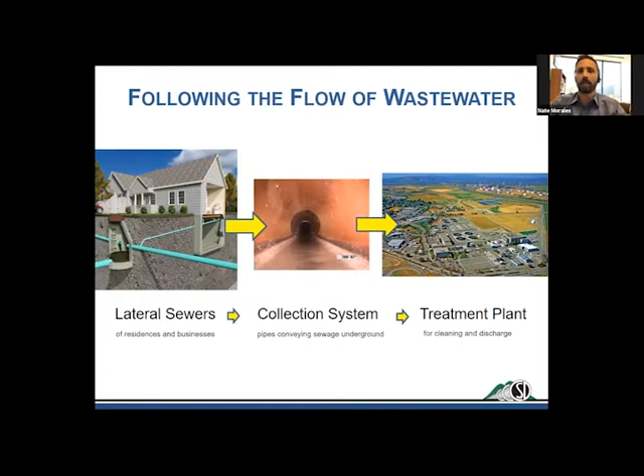Most agencies, though, find themselves with some customers that are in low-lying areas that require some pumping. And so at Central San, we have about 17 or so pump stations that pump out of areas like Orinda and Moraga up over the hill so that they can flow by gravity to our treatment plant.

So we've got two things to talk about here. One is our collection system, which is the network of pipes that are buried in the streets, and then also the treatment plant. So first, let's talk about the collection system. As I mentioned, there's about 1,500 miles of pipe, and in order to maintain and operate all that pipe takes a lot of work. We've got crews that every day go out and clean these pipes. Some guys run trucks that TV the pipes.

We have cameras that are mounted to tracks, and they drive up these pipelines and inspect them for cleanliness or damage. We also have crews that do other things like locate underground sewer lines if another company is going to come dig up a street, to ensure that they don't get damaged. And then finally, we also have crews who are responsible for going out and digging up pipes that maybe have broken or have a major clog or something that can't be retrieved otherwise.

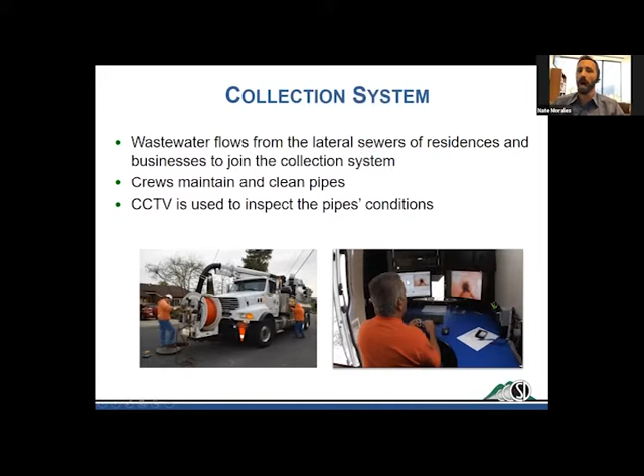So this photo here shows one of our large water flushing trucks. I'll talk more about that in a second. And here's one of our guys running the TV truck. So you can see he's got the TV footage here in these screens, and he's sitting in the back of a box van out in the middle of a street somewhere in our service area.

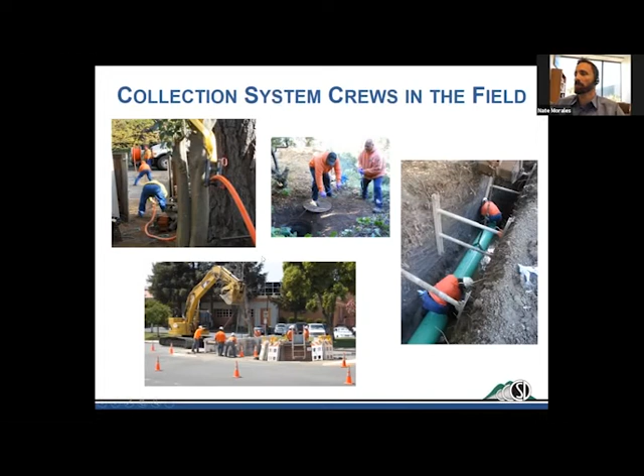There's two main types of sewer blockages that we experience in Central Contra Costa Sanitary District, and this is pretty universal among all wastewater treatment plants. The first of which is a root intrusion. Now, I think Emiliano, you asked about the history of pipes, and we're lucky enough at Central San not to have wood pipes, but we do have 100-year-old pipes in areas like Martinez and some of the older neighborhoods that are made of clay. And in fact, clay pipes were installed for, I don't know, 50 or 60 years beyond that, into the middle of the century.

So the good thing about clay is that it does not corrode. Clay pipe will last hundreds, probably thousands of years without breaking down. But the downside with clay is that it's brittle. And also when they originally installed these things, they come in very short segments. And so it's brittle and you have many, many joints. And so over time, we've found that the clay pipe is typically the first to crack, fracture, collapse.

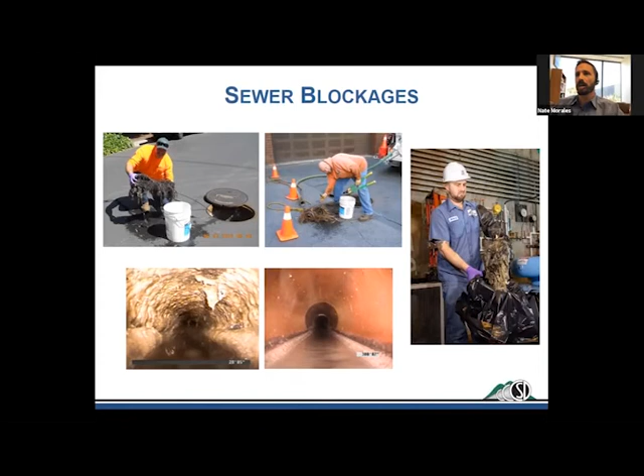Going to move on to the treatment plant. So as you might guess, our customers flush their toilets and run their sinks 24 hours a day. And so our facility also runs 24 hours a day, 7 days a week. On average, we receive about 40 million gallons of wastewater per day. And almost all of that water gets cleaned and then discharged to Suisun Bay, which is an offshoot of San Francisco Bay.

A smaller portion of that water gets cleaned to a further degree and then redistributed under water reuse. Matt alluded to that in his presentation. Basically, our reuse customers, our recycled water customers, use this water for irrigation or industrial uses. For example, a lot of golf courses will use the recycled water to water their facilities.

Matt also mentioned in his presentation that due to aging infrastructure of our collection system, the integrity of our pipes, and especially the clay pipes I was talking about, is not sound. These pipes are not necessarily watertight. So when it rains, the ground becomes saturated, and then that groundwater seeps into our pipes and increases the volume that we get at our treatment plant substantially.

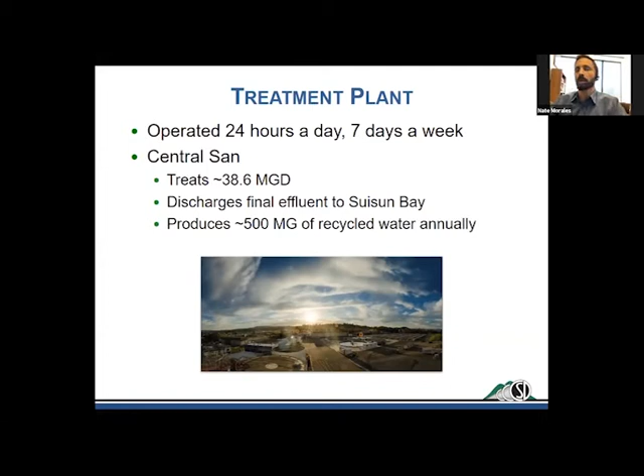All right, so here we go. We're getting into the nitty gritty now, and you should see some trends between the types of processes I'm going to describe and the regulations that implemented these processes that Matt talked about. So we're going to talk about primary treatment, secondary treatment, tertiary treatment, which is basically that extra step we take to make recycled water that can be used on those golf courses, and then, of course, solids treatment.

So let me take a moment here and just say that our goal at the wastewater treatment plant is basically to remove all the solids that have been introduced into the water, take those solids out, and send the clean water on its way to the bay. Those solids, as you can guess, are everything that we wash off of our bodies and dishes and everything else in our households, right? So when we take a shower, we introduce a little bit of dirt in the drain.

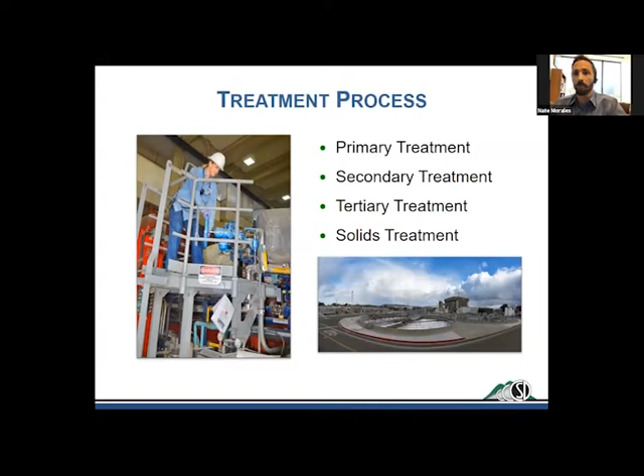When we do our dishes or run our garbage disposal, I think I saw a question on garbage disposals. When you run your garbage disposal, you grind up that celery, it goes down the drain and off to the treatment plant. And then, of course, everything that we flush down the toilet, right? It's our goal to remove all those solids, separate those solids from the water. And solids treatment is the process we use to dispose of those solids.

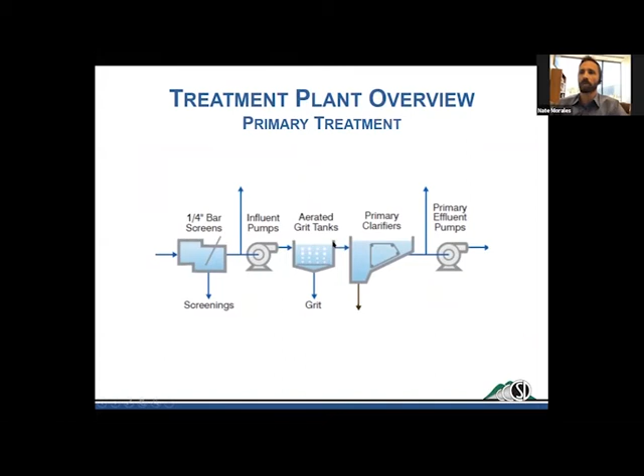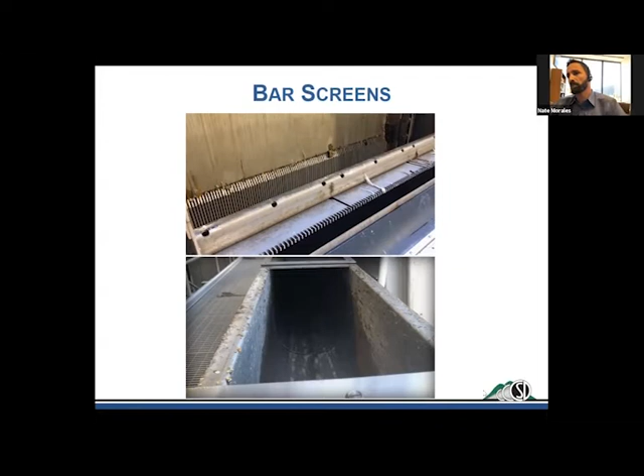And then the rake brings those caught solids up and drops them into this sluice right here. This is, you'll see in a moment, a slop of stuff that got caught on the bars, and it goes down this sluice to be compacted.

Now, I don't know if you guys caught it, but I want to again point out that most of what was getting caught on this bar screen was flushable wipes. They're back to haunt us. Here they are. They're getting caught, and we're trying to remove them.

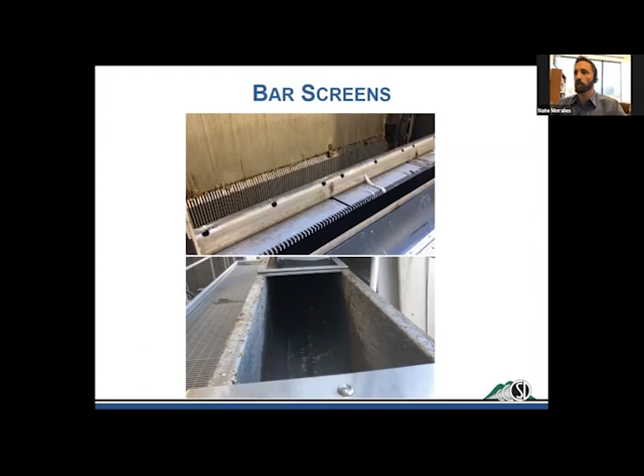So everything gets caught, goes down this sluice way, and then into a big compactor where we squeeze all the water out of it that we can and shove it through this pipe and basically make these huge sausages of whatever we caught. And here is a photo of our big old screenings sausages. These are about 18 inches in diameter.

And again, if you look at that consistency, this is mostly flushable wipes. And of course, there's a bunch of other stuff, but a large part, it's flushable wipes. So this then gets hauled off to a landfill.

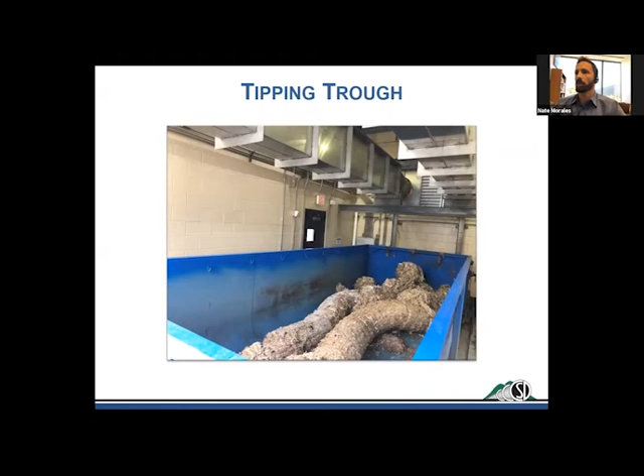All right, so from there, we take the water that passes through the bar screen and pump it up to the primary tanks. These are the pumps that we use to pump the water up to ground level of those primary tanks. You have to think about it. This water has just flowed miles and miles and miles.

In order for the gravity system to work, we have to bury our influent structures 20 or 30 feet deep in the ground. Well, it's so deep that you can't really work with it. So this first step here is to pump the water up to ground level.

And these pumps are huge. I think the ones in the foreground are 700 horsepower, and that's a typical size for some of our larger pumps at the plant. They run 24 hours a day, and they move water really well, as you'd guess. They fill an average backyard swimming pool in a couple seconds.

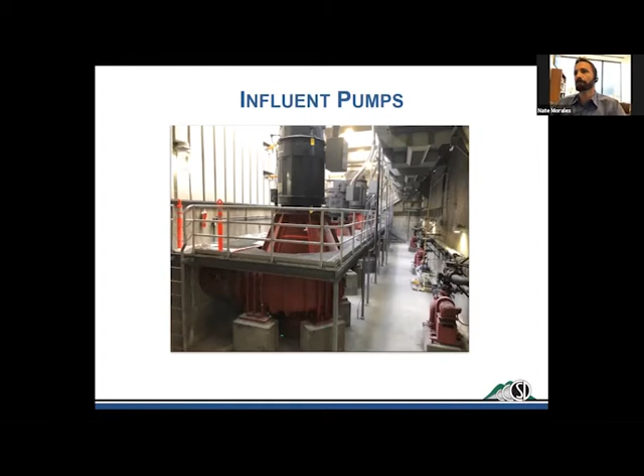So from these pumps, we flow into the primary tanks, and this is what Matt was talking about. This is what the regulators imposed in the 1950s, the implementation of primary sedimentation. This is a long tank, and the objective here is to introduce the water into the front and move it as slowly as possible across the tank to allow anything that's denser than water to slowly settle to the bottom. All the big chunks, right, as Matt said.

So the big chunks settle to the bottom, and then we have a scraper that runs along the bottom and collects those solids and pumps them over to our solids handling process. So this is the workhorse of the primary treatment process.

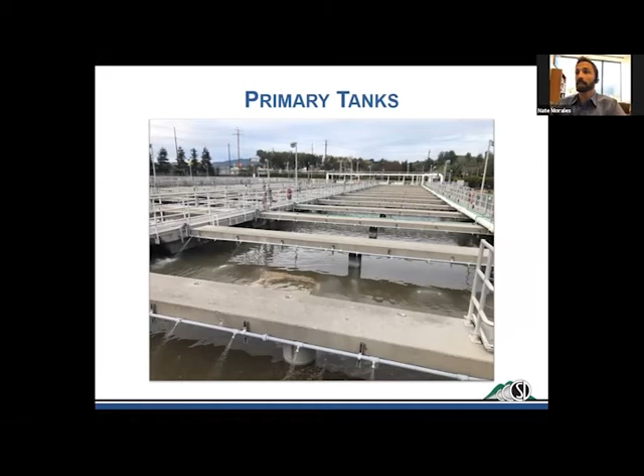From here, we move on to the secondary process. And as we just learned, in the mid-1970s, the secondary process was mandated. And again, here is a little schematic of our secondary process. Today, we're going to talk about these three components: the aeration tanks, secondary clarifiers, and UV. So from the primary tanks, water flows to our aeration tanks. I'm going to move to this next slide so you can see a photo of an aeration tank.

So think about it now. Our objective is to remove all of the solids from the water. We've just removed everything that's heavier than water that's settled down in the primary tank. And so what's left is all of this super fine particulate and anything that has dissolved in the water. So in this stage of the process, we're going to do our best to remove all of these ultrafine and dissolved solids that are left in the water.

The way we do that is by employing billions, probably trillions of little tiny microorganisms that want nothing more than to consume these little bits of organics. To them, this is food, right? And so I'm going to push play on this video. This is what the water looks like as it's flowing into the beginning of our aeration tank. You can maybe pick up the fact that it's sort of bubbling out here.

That's because at the bottom of this tank, there are diffusers that are releasing ultrafine air bubbles in order to increase the dissolved oxygen here. Because the little tiny microorganisms, the bugs as we call them, they're living in this water. They need air to respirate and to do their job.

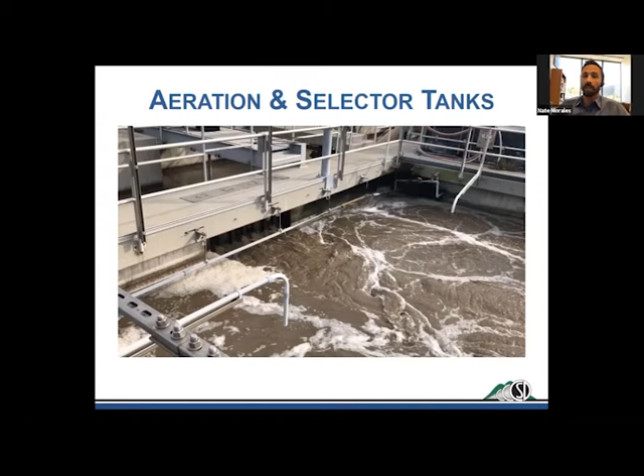And if we've done our job right, then at the end of this tank, we've got clumps of these little guys, all fat and happy, hanging out together, which sets us up perfectly for the next phase of the process, the clarifier. So here is a traditional secondary clarifier. It works very similarly to our primary tank.

Basically, the water that just came from the aeration tank is discharged in this center well, and the water then moves very, very slowly outward towards the edge of the tank. And because there's no turbulence, all those microorganisms that are hanging out together, they're denser than water, and they very slowly settle to the bottom of the tank, and the clean water then reaches the edge and spills out over the top.

So the clean water goes on to the next step of the process, and the bugs that are at the bottom, we suck them up with a little water vacuum, and we send them over to the solids building for processing, and we'll talk about that in a minute. So from here, the water is quite clean. This is the tank where we'll most commonly see ducks and seagulls. They love hanging out here.

There's just one final step that needs to take place before we can discharge this water to the bay, and that is disinfection. And so there's a couple common ways that wastewater treatment plants disinfect their wastewater. Many agencies will use chlorine, which is effectively bleach, to kill anything that's left, any bacteria, virus, or any of these microorganisms that slip past our system.

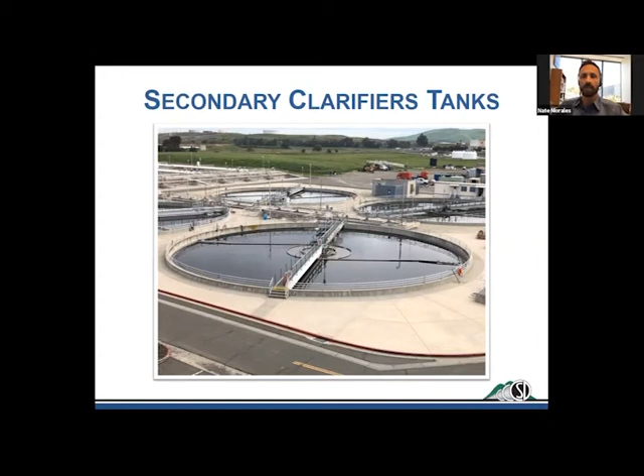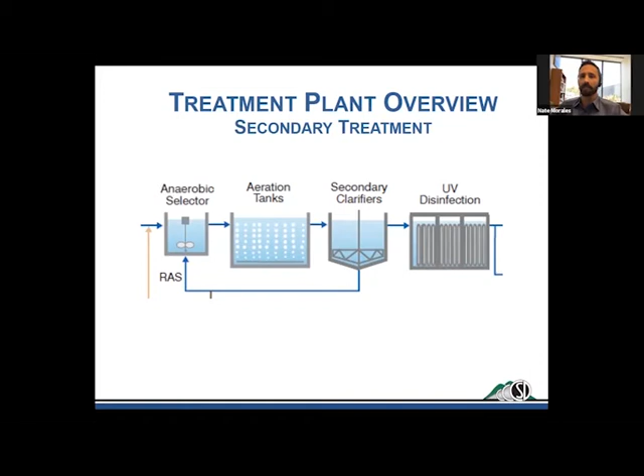But we at the district, we use UV disinfection. I don't have a great photo for you, but basically we run the water through these channels that have thousands and thousands of UV emitting light bulbs that kill any of the bacteria or bugs that are left. We basically sunburn them to death. So that is the end of the secondary process.

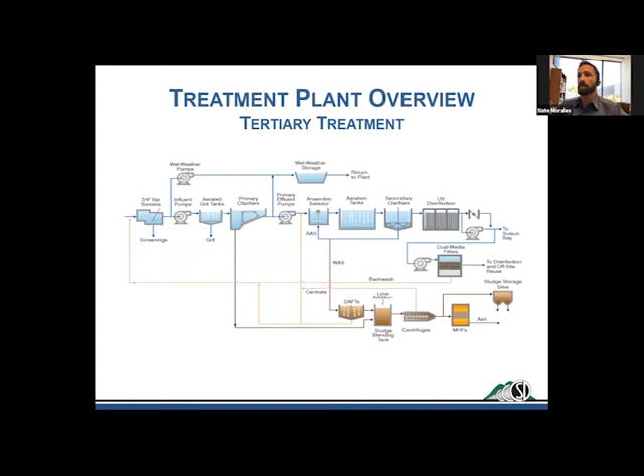From here, let's talk about the solids process a bit. Oh, actually, no, I forgot one point. I've got one slide here. Again, no great photos, but a little snippet from the schematic. Recall that we take a portion of the water that we send to the bay and clean it to a further degree. So we do that at this facility we call the filter plant, and it's essentially a form of tertiary treatment.

At our filter plant, we have a layer of basically crushed coal, we call it anthracite, over a bed of sand, which is over a bed of gravel, and the water is poured on top of this media. And as the water trickles down through the sand and through the crushed products, it gets cleaner and cleaner and cleaner, and all the remaining particulate gets caught up.

This works a lot like groundwater infiltration out on the earth. Just as rain percolates through a soil and gets cleaner and cleaner as it goes, this is water percolating through this sand media. And so then from there it goes off to reuse to our golf courses and to our industrial users like we talked about.

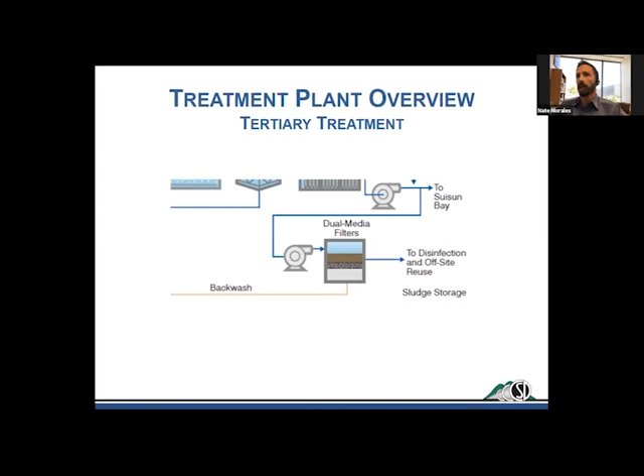Okay, now I think we're ready for the solids process. So there's a few different components of our solids process. Our solids process is a little bit unique. And I will talk about how we deal with our solids, and I'll mention briefly how most agencies manage their solids as well. So now we've got solids that have settled to the bottom of the tank in our primary tanks, right? All the big stuff.

We've got all these fat and happy bugs that have settled to the bottom of the clarifiers, and we pump all that material over to a blending tank. We blend it all together, and at this point, it's right around 97%, maybe 96% water. It's mostly water with a little bit of other stuff in it.

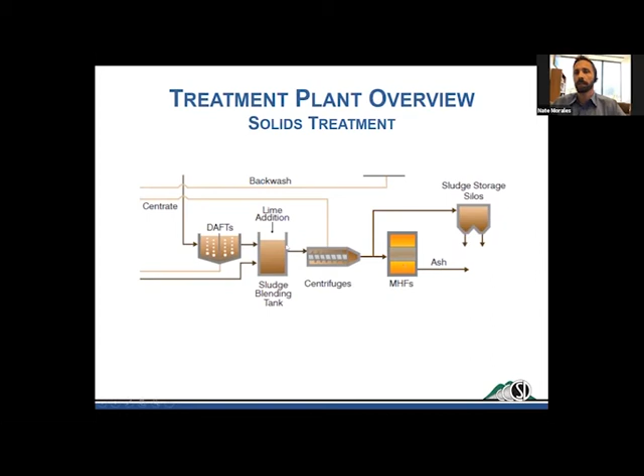It's not too glamorous on the surface, but basically inside of here is a cylinder, and it spins very, very fast and creates centrifugal acceleration. And just like the spin cycle on our washing machines, the water is separated from the solids. And so the water goes back to drain, and the solids, now that they've been thickened up, are ready to go to our furnace. At this point, we've removed a fair amount of the water, but not all the water. The product is right around 70% water and 30% solid.

So from there, we pump this solid. It's the consistency of toothpaste. It's thick, it's dark brown. It's probably the most foul substance we have at our facility. We affectionately call it cake because of the color, but trust me, you want to get nowhere near it. So this cake gets pumped to our furnace.

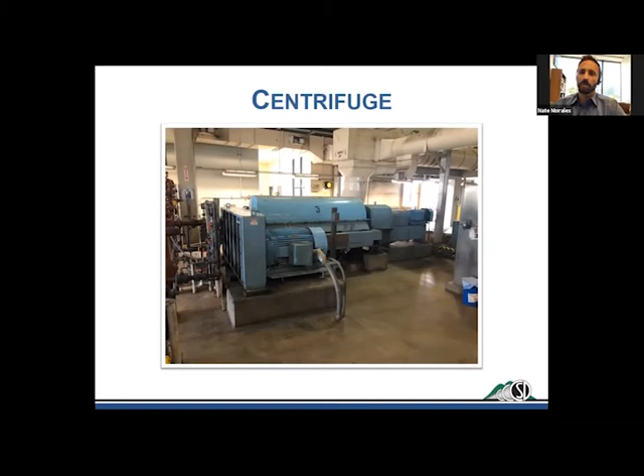The other thing that's worth noting here is that there is value in this sludge. There's a value in this combustion process. We actually are able to gather much of the heat that's being generated by burning these solids. We take that heat, we run it through a boiler, we make steam, and then we use that steam to turn a big blower that blows air into those bubbling aeration tanks. And so in that way, we try to be efficient with the process.

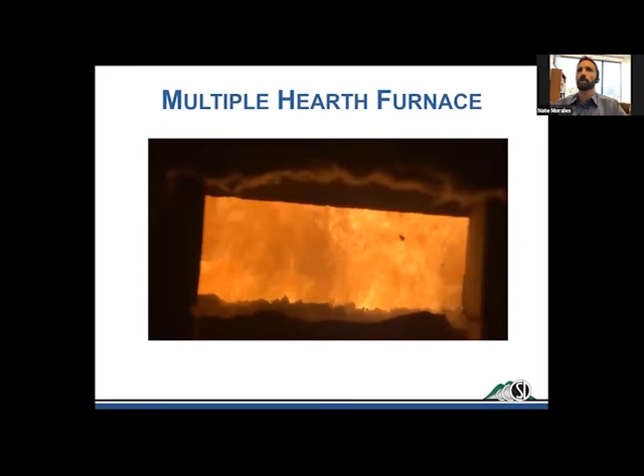All right, so we are absolutely the minority in the fact that we burn our solids for disposal. Most facilities like East Bay MUD and everyone else in the Bay Area have digesters. And so instead of burning their sludge, they take that soupy mixture and pump it into a large tank that's called a digester. And in here, there's a different type of microorganism that basically consumes or metabolizes those solids, and as a byproduct produces CO2, but most importantly, methane gas, biogas, which can then be used to generate electricity and generate heat to keep the temperatures in this digester up. Because in order for this digester to function, the temperature has to be fairly warm.

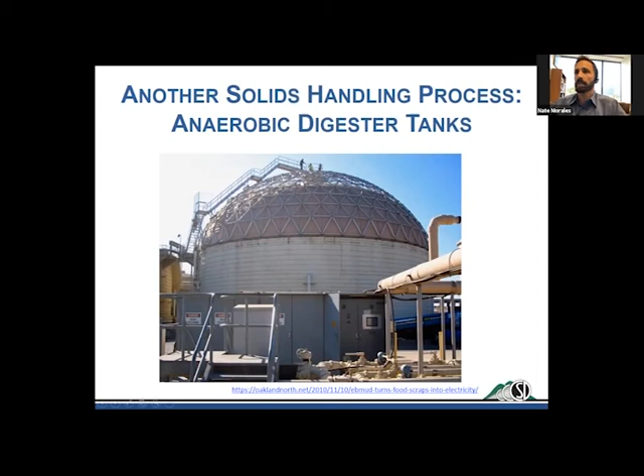So I think we've reached the end of the treatment plant process. Got a couple of slides for you on the maintenance of this complex treatment plant system, and then we will open it up to questions. So we talked about some of the major equipment, but also we have boilers on site. We have a huge generator that runs on natural gas. It's essentially a jet engine that turns a big generator. We have huge diesel-powered engines to generate power in the event that PG&E goes out of service. We have a whole array of huge and interesting equipment that for someone like myself, a mechanical engineer, I find so fascinating.

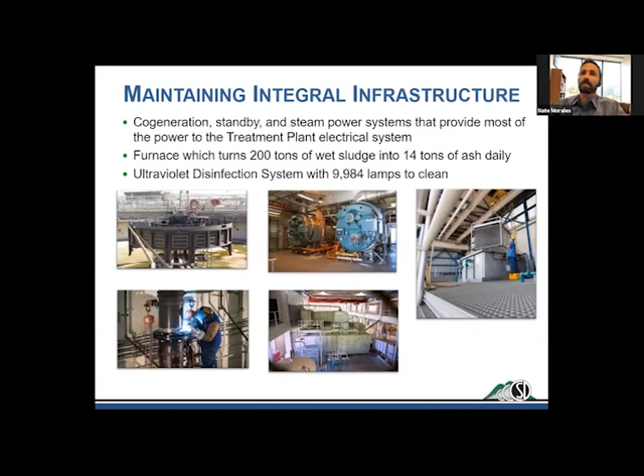We have a team of maintenance staff that includes mechanics and electricians and instrument techs who spend their days performing work on these systems, replacing parts, rebuilding pumps, investigating electrical work. And of course, their objective is to address all issues before they become real issues, right? In terms of preventative maintenance. So almost all the work that we do is preventative in nature, but of course we do have failures that catch us off guard, where guys have to be called in on weekends or nights to come in and take care of an issue if it's deemed to be critical.

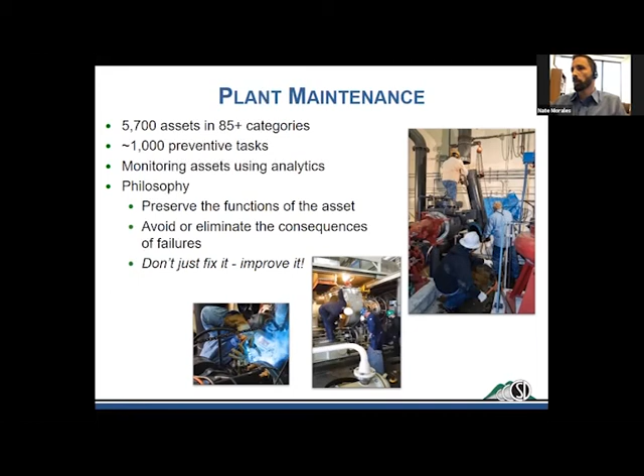So that's the story. That's our treatment plant in a nutshell. Although our systems are not identical, all the treatment plants are for the most part fairly similar. I'm passionate about it. I find it fascinating. I hope you guys got a little taste of that. There's a lot that goes on here. So with that, I'd like to open it up to questions and see what you guys got.

Great. I have to apologize at first if I mispronounce anyone's name, because I probably already have.

At times, things do go bad. Sometimes it's due to weather or temperature. Other times it's because we'll have illegal discharges where chemical is discharged in the sewer system that will damage or kill the bugs. And in those times, we do have to add chemicals to aid the process. But that's very rare. What happens most frequently is, as I was mentioning, there's a certain species or a few species of bugs that we really want to promote.